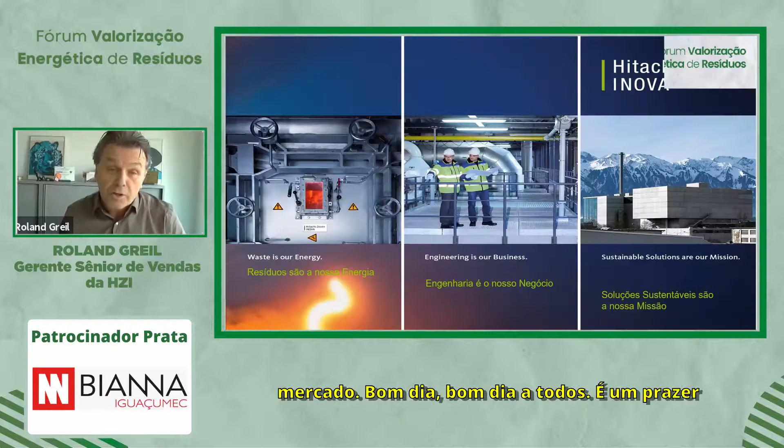Good morning, bom dia a todos. It's a pleasure for me to participate in this event. I will talk about how we, as HZI, Hitachi Zosen Inova, can contribute to the development of waste to energy in Brazil.

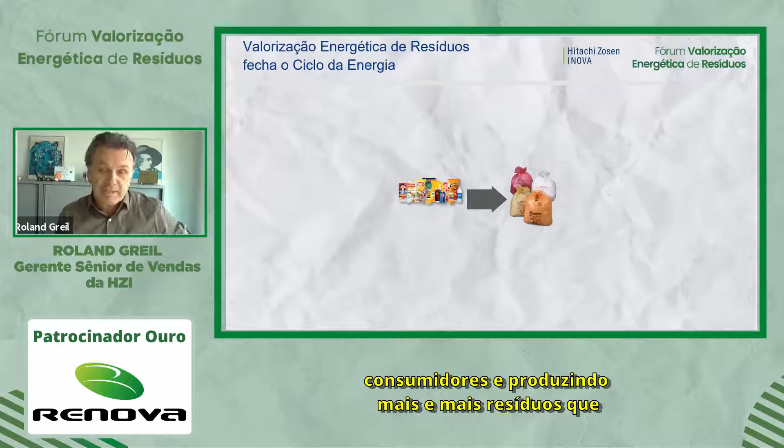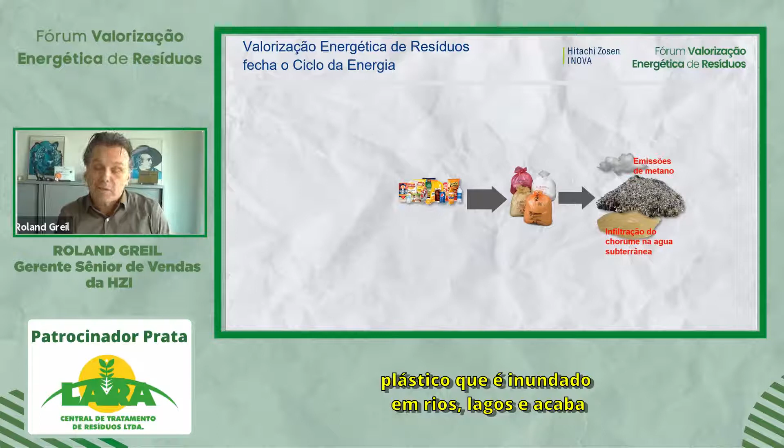We are all consumers and producing more and more waste that is polluting our environment, our drinking water, the air, plastic that is flooded into the rivers, lakes, and ends up in the ocean, and is also polluting our food. Raw material is used to produce those products and also to generate electricity.

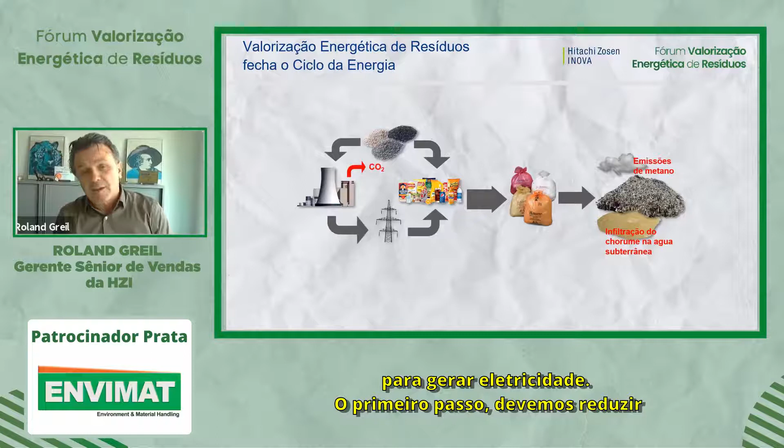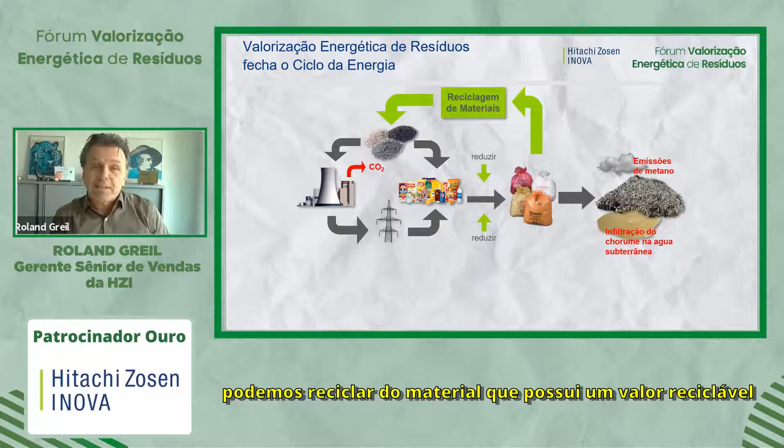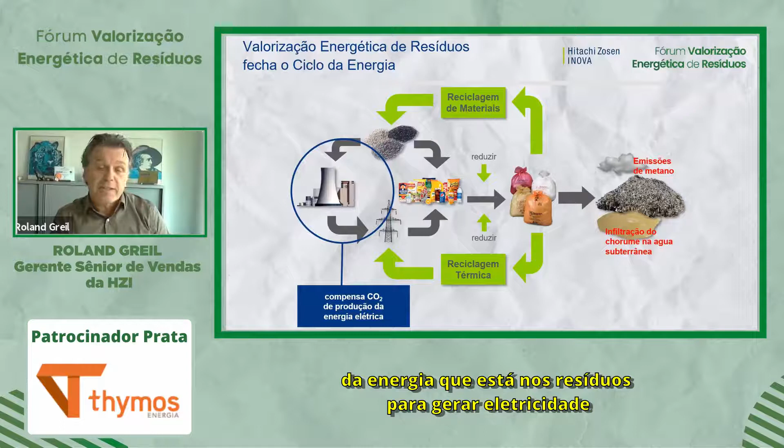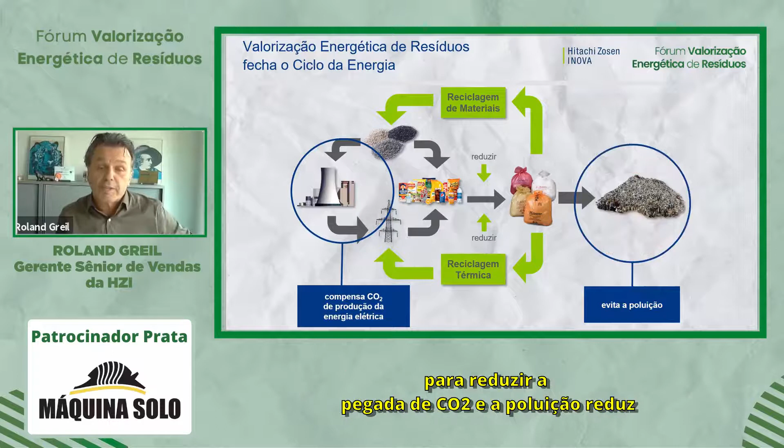In the first step, we should reduce the amount of waste we are producing, and what we can recycle, material that has value, shall be recycled and serve as a raw product to generate electricity or produce products again. From what cannot be recycled, the energy shall be recovered. That is the solution we can provide to benefit from the energy in the waste to generate electricity, and to recover materials that cannot be recovered upfront. This helps reduce the CO2 footprint and reduces pollution.

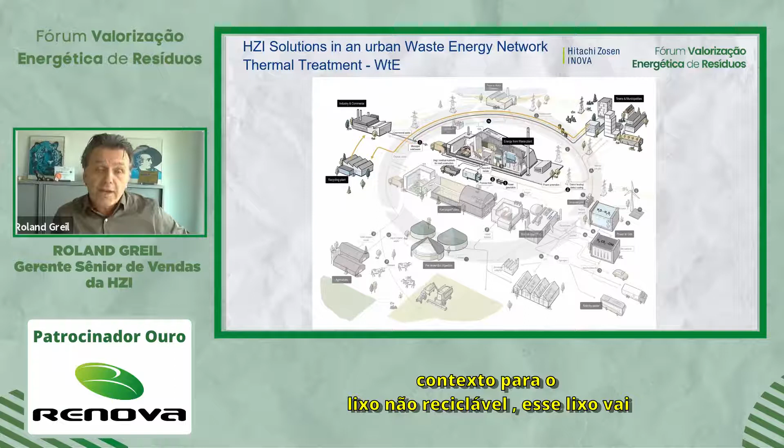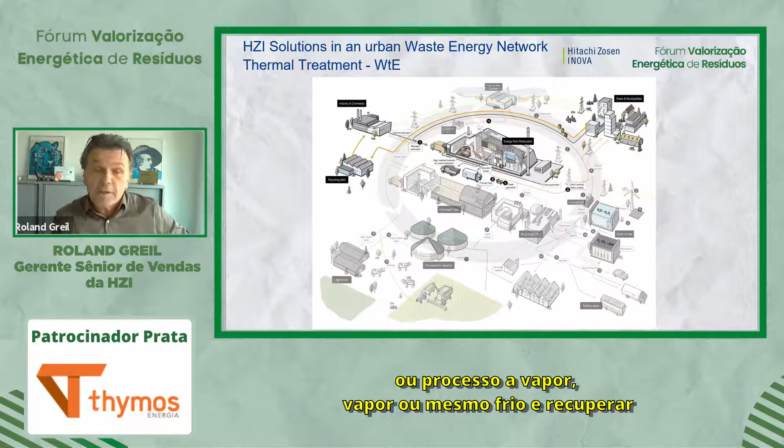What are HZI's solutions in this context? For the non-recyclable waste, this waste goes to waste to energy facilities, to thermal treatment, where, as I said before, you generate electricity, heat or steam, process steam, or even cold, and recover materials that cannot be recovered upfront. Recyclable materials can go directly to the recycling industry.

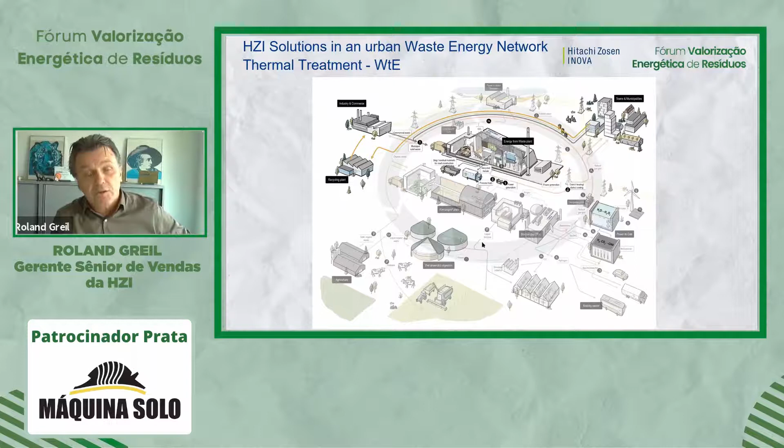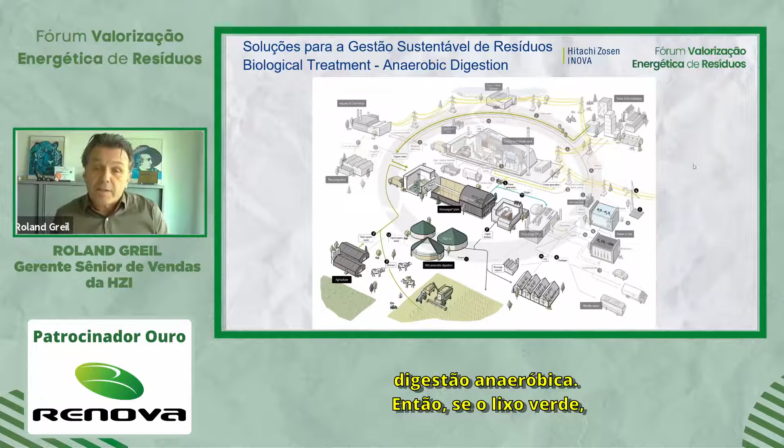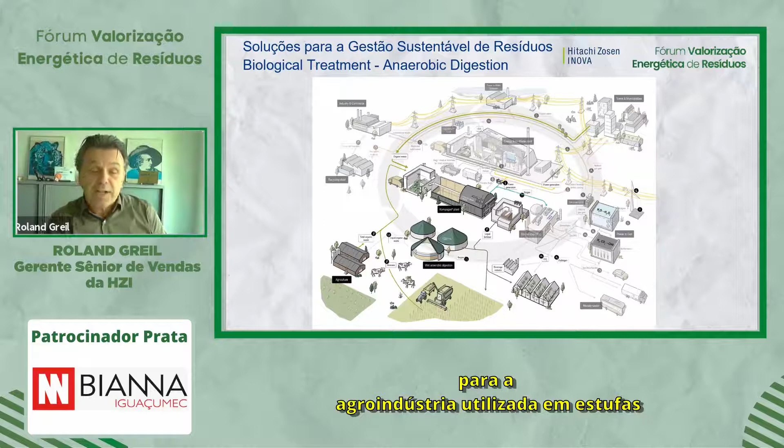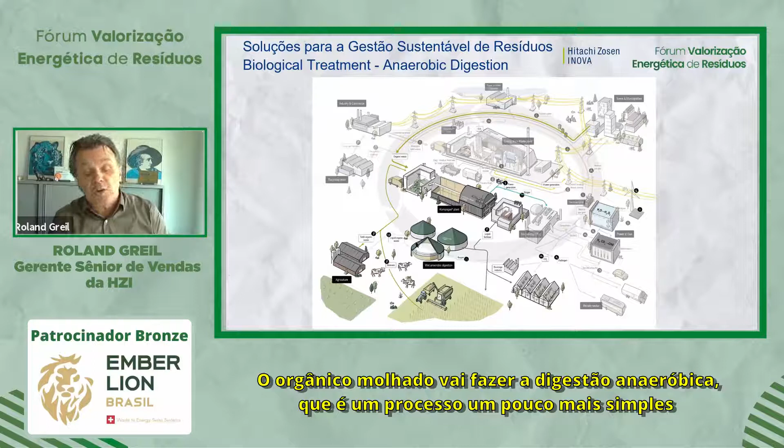For the organic waste, we are using our CompoGas technology, a dry anaerobic digestion, where green waste, organic waste from households, supermarkets, markets, the food industry, and also agriculture is delivered, and biogas is produced, and also fertilizer, which then goes back to the agricultural industry, used in greenhouses or in gardening or parks. The wet organic fraction goes to wet anaerobic digestion, which is a bit more simple process.

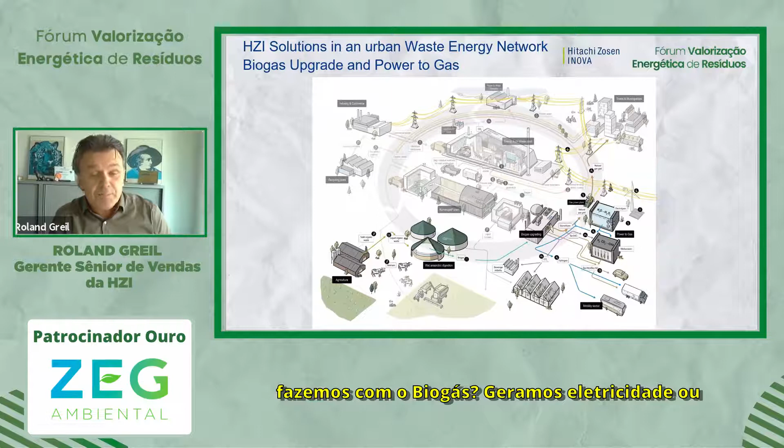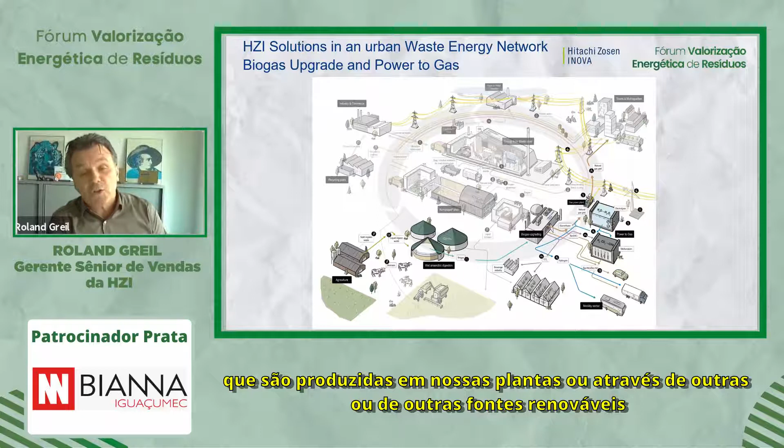What do we do with the biogas? We generate electricity as well, or we do the biogas upgrading to biomethane, which can then be used as fuel for vehicles. And for the excess energy produced from our plants or from other renewable sources, we use that in our power-to-gas solutions.

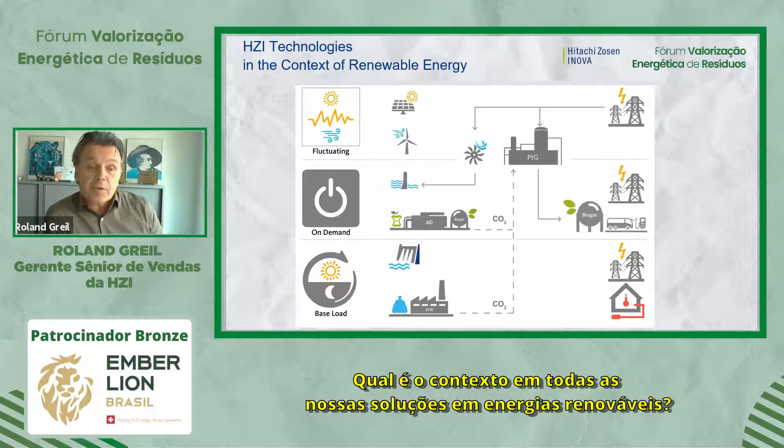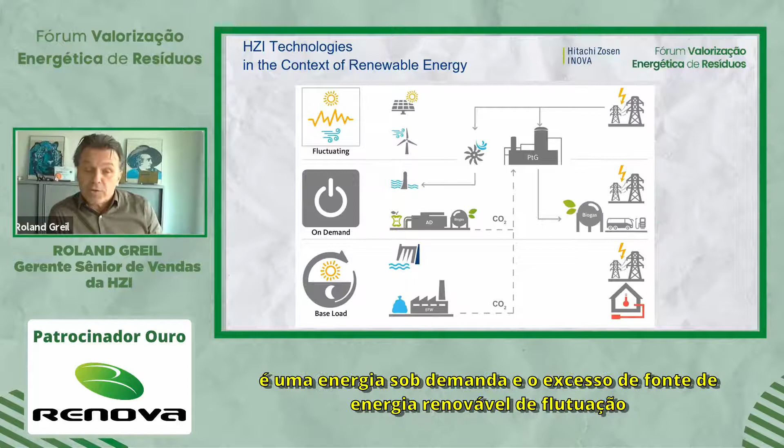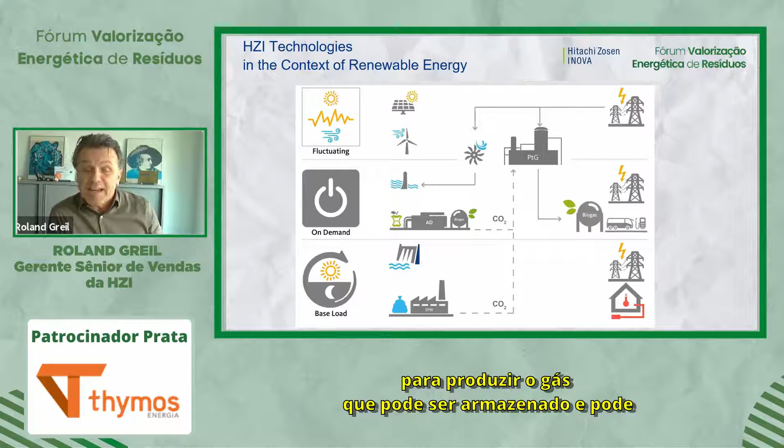What is the context of our solutions in renewable energy? Waste to energy is delivering the base load, constant production. AD, where you can store the gas, is on-demand energy. Excess energy from fluctuating renewable sources can be used in our power-to-gas solutions to produce gas, which can be stored and used when there is demand.

Hitachi Zosen Inova is a company located in Switzerland. We have our headquarters here in Zurich, with about 600 people working on solutions to deliver plants to our customers. We have other locations; in total we are a bit more than 1,000 employees, and we have belonged for 10 years to our Japanese parent company, Hitachi Zosen Corporation, which used our technology before as a licensee to build plants in Japan and other Asian markets.

As presented before, we have our proprietary technology for thermal treatment of solid wastes, anaerobic digestion of bio-waste, biogas upgrade systems, and power-to-gas systems. We don't only deliver and build plants, we also operate, maintain, and service the plants we have delivered.

Our market share over the last 10 years was a bit above 27%, and in recent years even above 30% worldwide. That is both together: our parent company covering the Asian markets, and we basically covering the rest of the world. This is all counted on capacity installed.

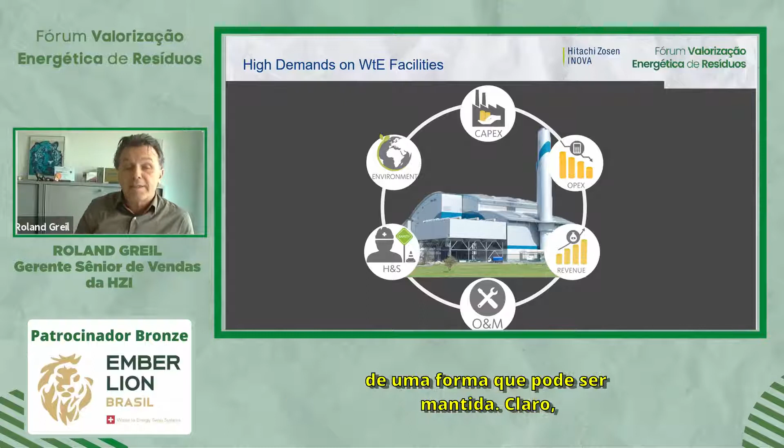We design plants for a long lifetime. Plants can live for 40 years, that is typically the average lifetime such a plant can reach, and design it in a way that it can be easily maintained. Of course, health and safety is a very, very important aspect as well, so we design a plant in a way that people during construction and operation are protected.

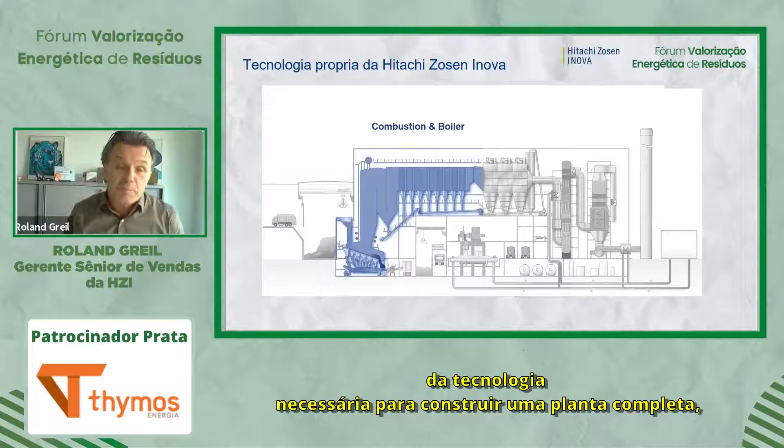We have all steps of the technology needed to build a complete plant. First section is the combustion boiler section, flue gas treatment, residue treatment, and also energy utilization.

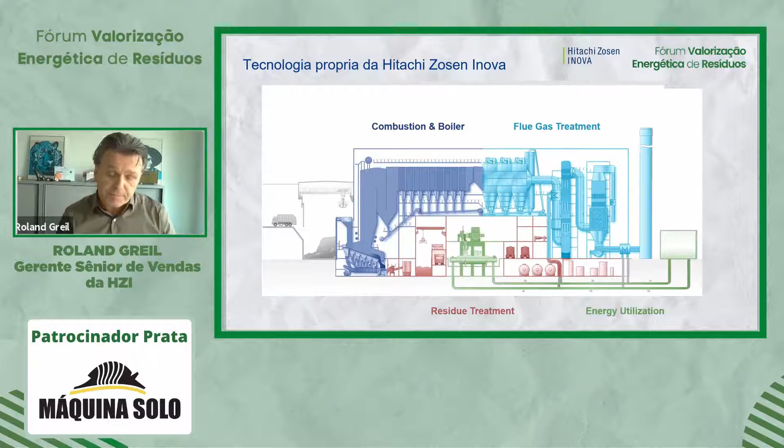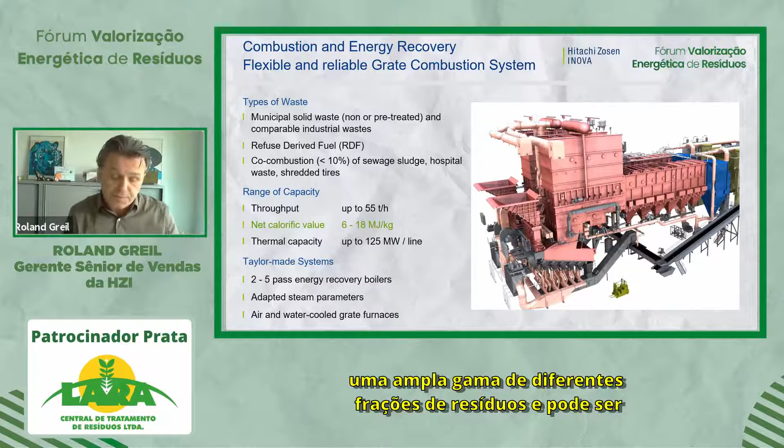Our technology, and I focus today on waste to energy, not on the treatment of biological waste, but on the treatment of non-recyclable waste, is a grate combustion technology which can take a wide range of different waste fractions and can be adapted to the local requirements and to local waste composition and specific situations.

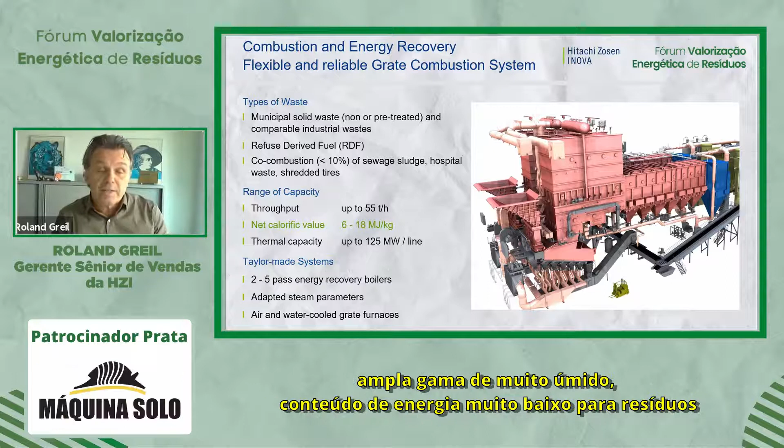You see here the range of net calorific heating values. This is a very wide range, from very wet waste with low energy content to waste with very high energy content. And we can deliver...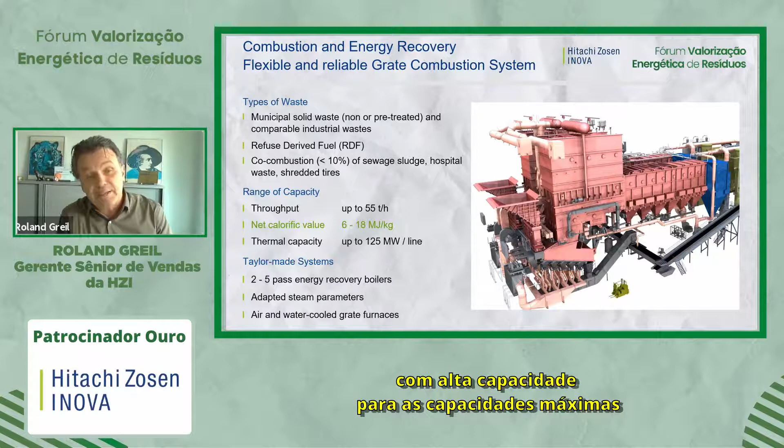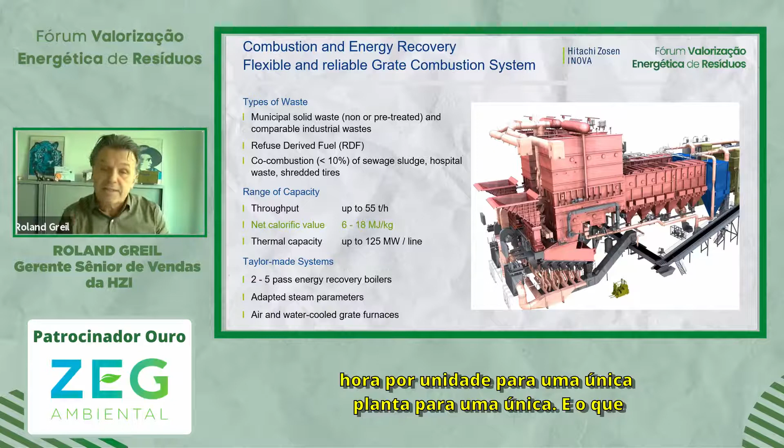plants with high capacities. The maximum capacities where we have executed projects is up to 55 tons per hour per unit for a single plant, for a single boiler, what you can see here on the picture. And the thermal capacity, that means fuel input, of 125 megawatts per line.

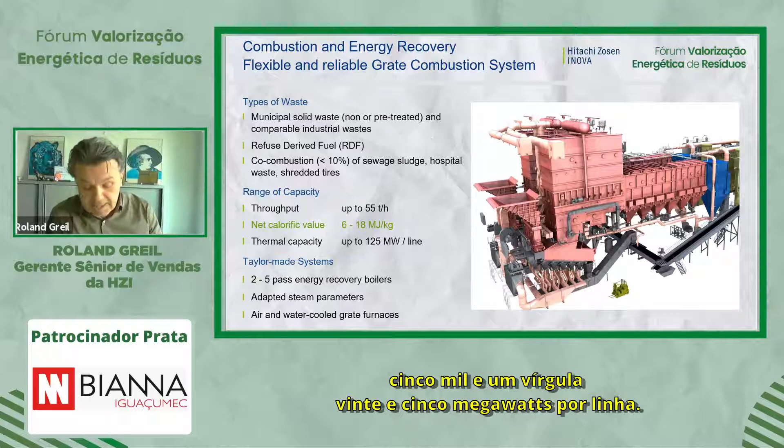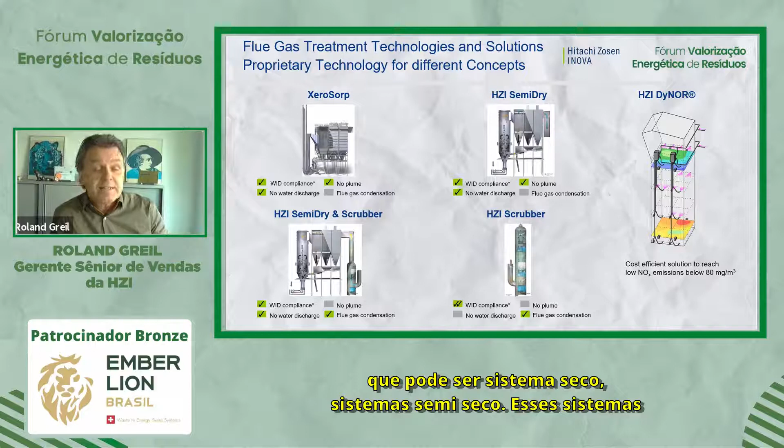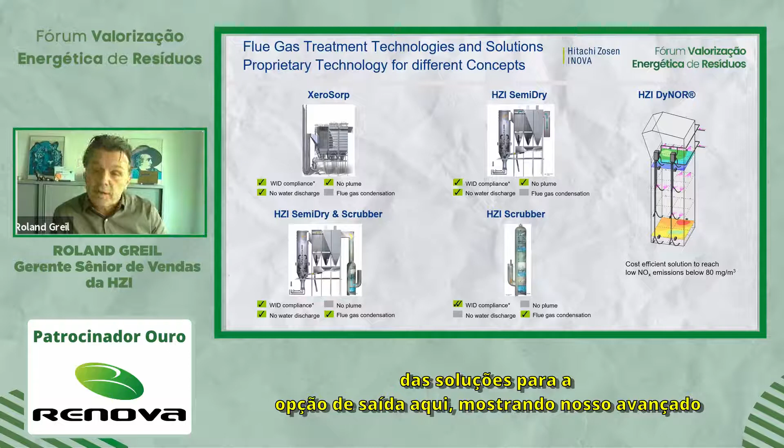We have also all kinds of flue gas treatment technologies, which can be dry systems, semi-dry systems, wet systems, or combinations of those systems, depending on the situation and local requirements. And also solutions for NOx reduction. Here I'm showing our advanced DyNOR system, an advanced SNCR system that can reach very low NOx levels in a very simple way.

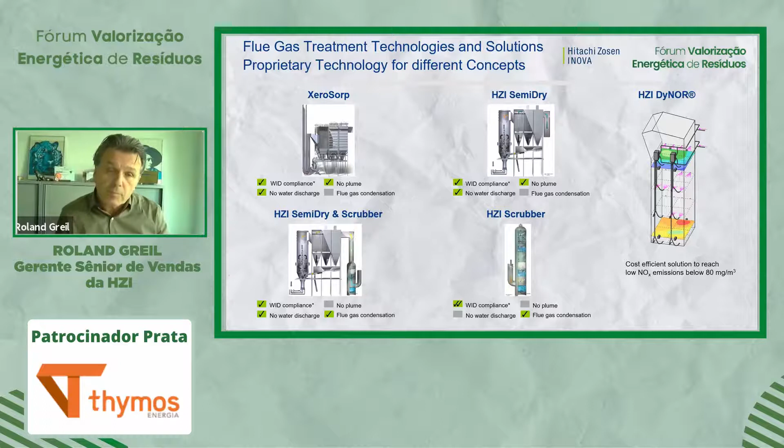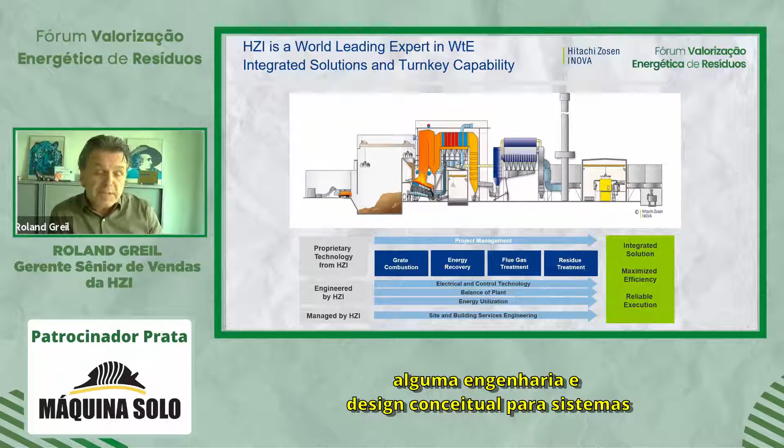We integrate the technologies that I've just presented, our proprietary technology, to deliver complete waste-to-energy facilities. And we do some engineering and conceptual design for systems that are not our core technology, such as electrical installations, control system, balance of plant system, and water steam cycle.

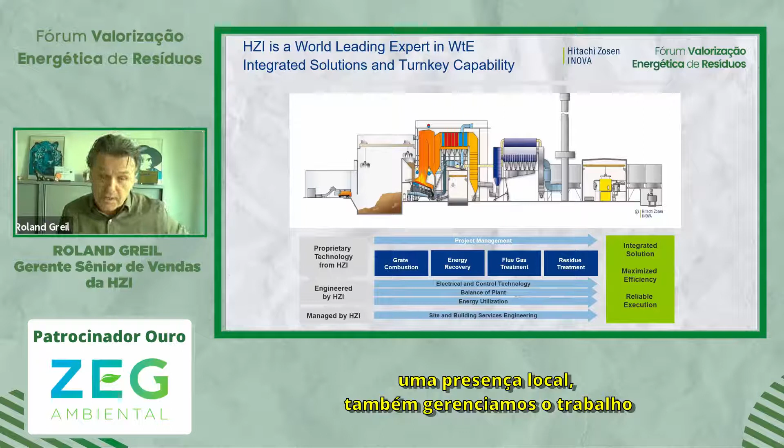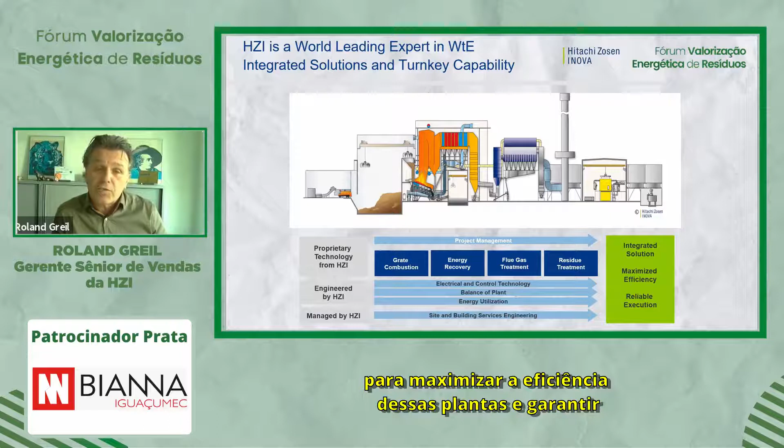And in markets where we have a local presence, we also manage civil work activities. Doing it in this way allows us to integrate those solutions in the best way, to maximize the efficiency of those plants and guarantee a reliable execution.

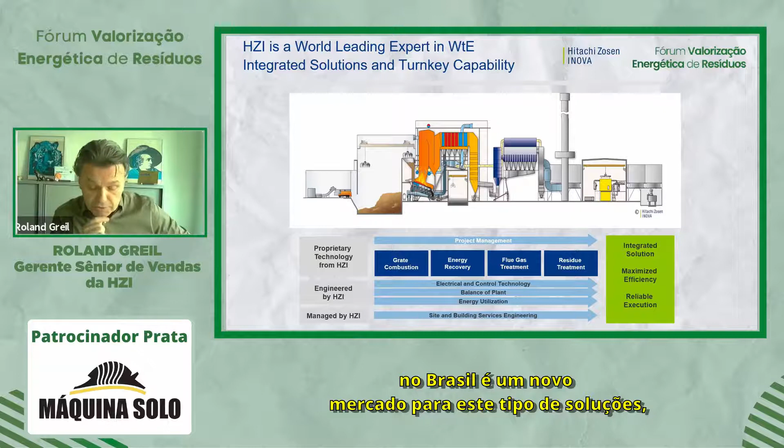This also means that in a new market, and Brazil is a new market for this kind of solutions, we typically team up with a local partner that has a strong local presence, good track record, and local experience.

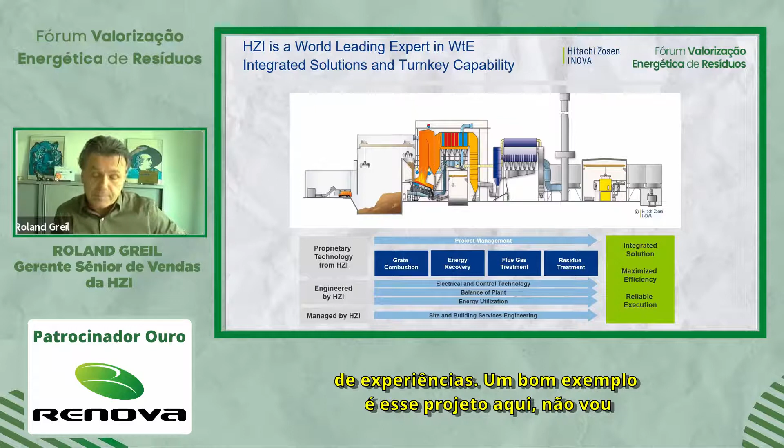A good example is this project here. I will not show the videos, but you can go to YouTube, search for Rookery South construction progress, and you will see the whole construction of this plant in four phases, four videos, building up such a plant. It's quite a complex thing, and it takes about 3 years to build such a plant.

This is a plant in UK, where we have been fully responsible for the full EPC turnkey wrap.

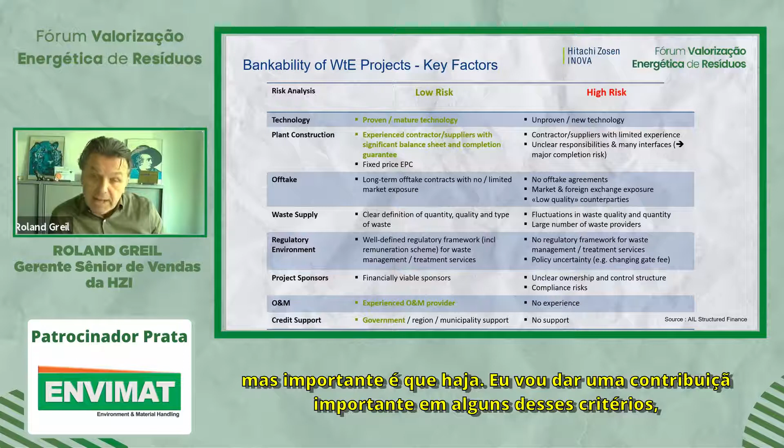A very important aspect is the financing, of course, of this kind of projects. I've listed some key factors on this slide. I will not go into the details, but importantly, for some of these criteria, HZI makes an important contribution. We deliver proven, mature technology, which is the grate combustion.

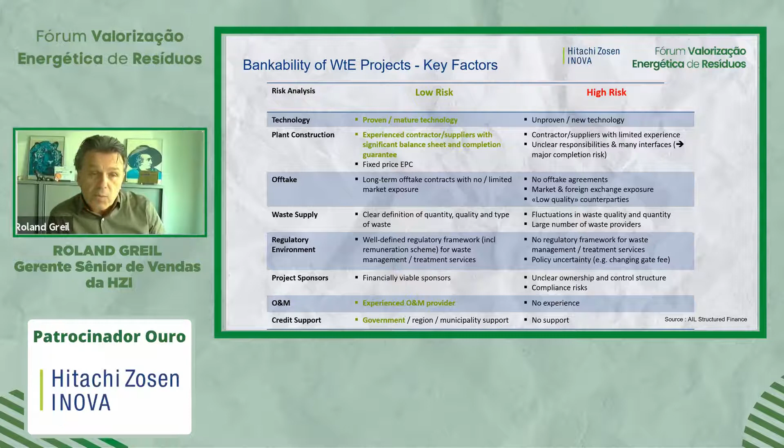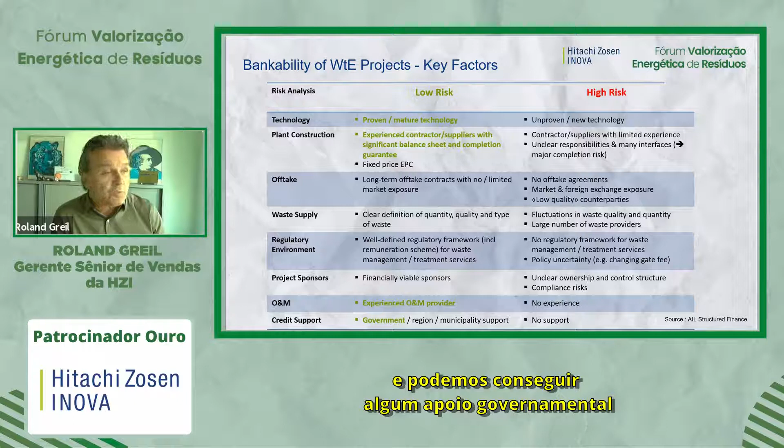We are an experienced contractor, you can see our references on our homepage. Only in UK, we have built in the last years 14 waste energy plants. We have a strong financial background, supported by our Japanese parent company, Hitachi Zosen Corporation. We have O&M experience, so we can provide also O&M support. And we might be able to get some governmental support from the Swiss Export Credit Agency, which is the SERV, to facilitate the financing of these projects.

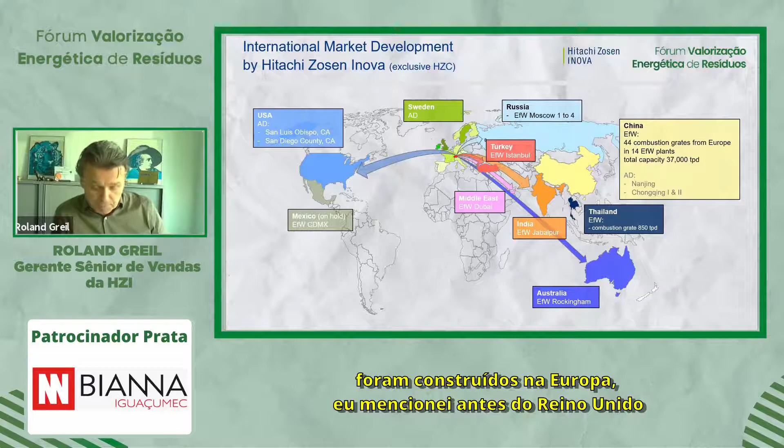Over the last years, Europe was our home base, so most projects have been built in Europe. UK was by far the biggest market over the last 10 years. Worldwide, it was China, where most of the plants are built on licenses from European companies such as us, but for some plants, especially the big ones, we deliver the combustion grates out of Europe to these plants in China. I will now show you some of our projects in new markets: in Turkey, in Australia, in Russia, and in the Middle East.

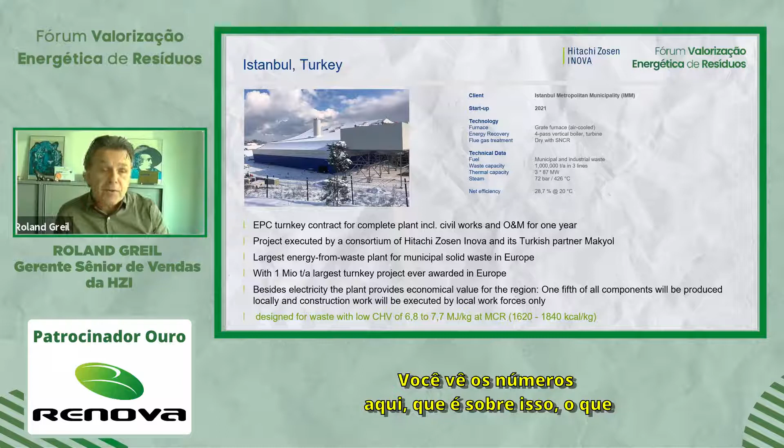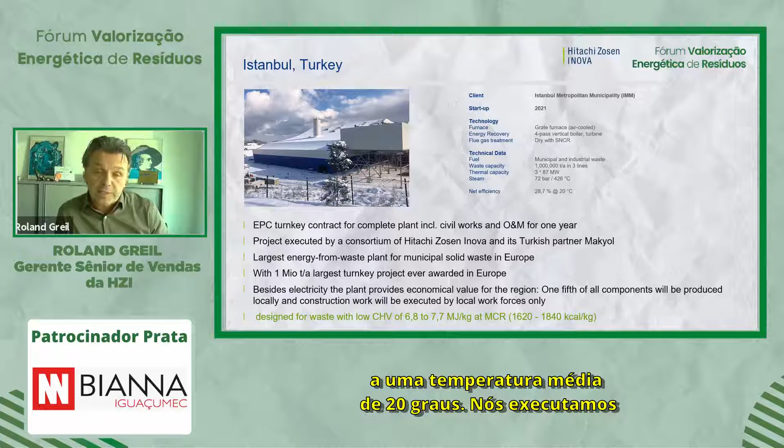One of them is this plant in Turkey, Istanbul. It's the biggest plant in Europe, just in commissioning. We started to thermally treat the waste at the beginning of March. This plant is designed for waste with quite a low heating value. You see the numbers here, which is about what you can expect from the waste that has to be treated in Brazilian facilities. Nevertheless, this plant reaches a high efficiency of almost 29% at an ambient temperature of 20 degrees. We execute this project in cooperation with a local Turkish partner, responsible mainly for the civil works activities, and together we are responsible for the erection of the equipment that we deliver to this plant.

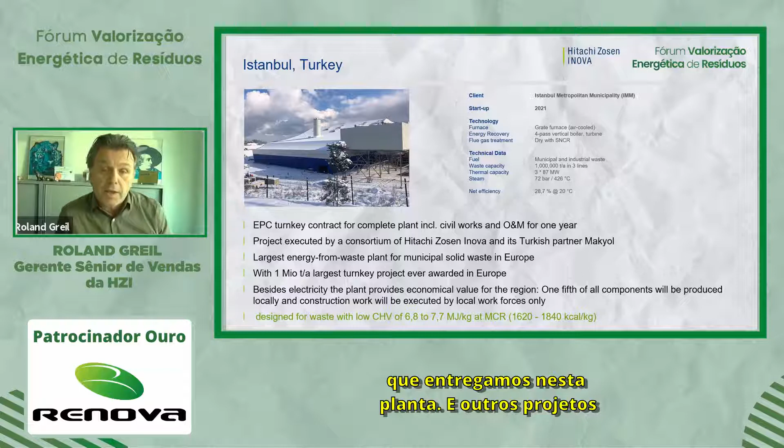Another project, or actually 4 projects, are in Moscow, around Moscow. So we have 4 plants around Moscow, and waste is delivered via transfer stations to one of these facilities. 3 of these plants are already in construction, and the driver here was the strategic decision by the Russian government to have a certain amount of energy produced by renewable energy sources. In this project, we deliver the key technology, our process technology and key equipment, to local partners, which then erect the plant and are responsible for the installation and commissioning of that plant.

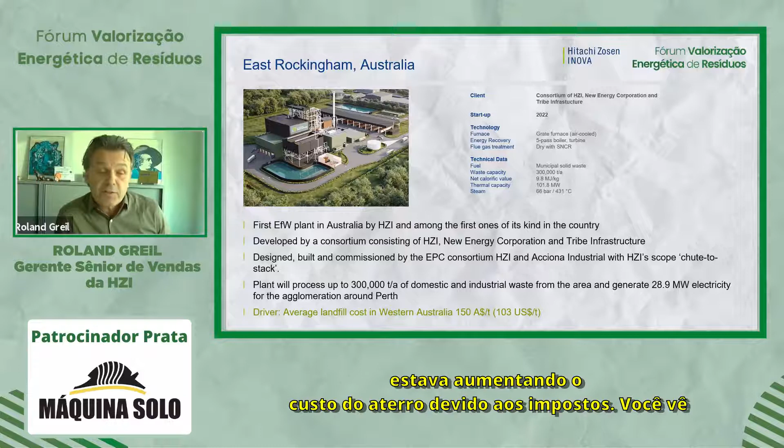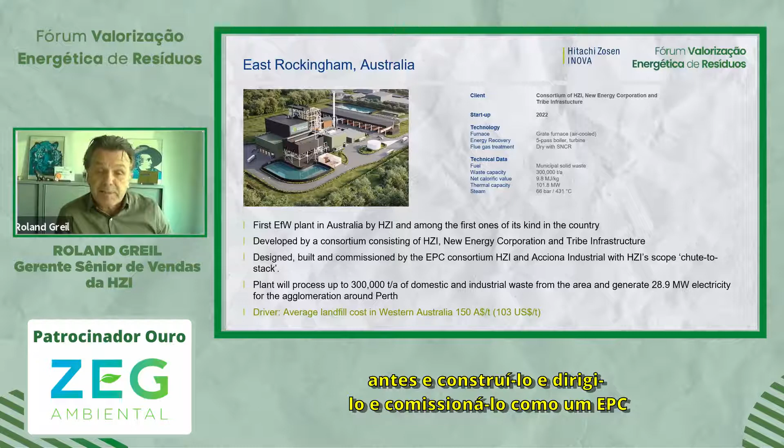Another project, that is our first project in Australia, which we contracted about a year ago. The driver here was increasing landfill costs due to taxes - you see the numbers, quite high taxes. Here also we deliver chute-to-stack equipment, the main process that I've presented before, and build it, erect it, and commission it as an EPC consortium with joint responsibilities with a partner that has a local track record and a strong local background.

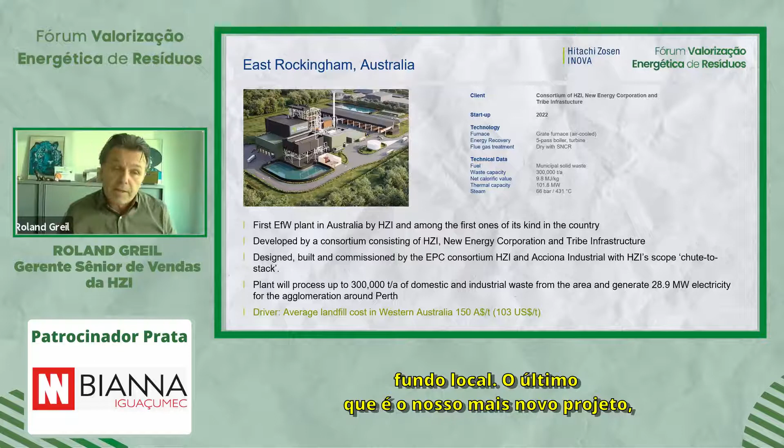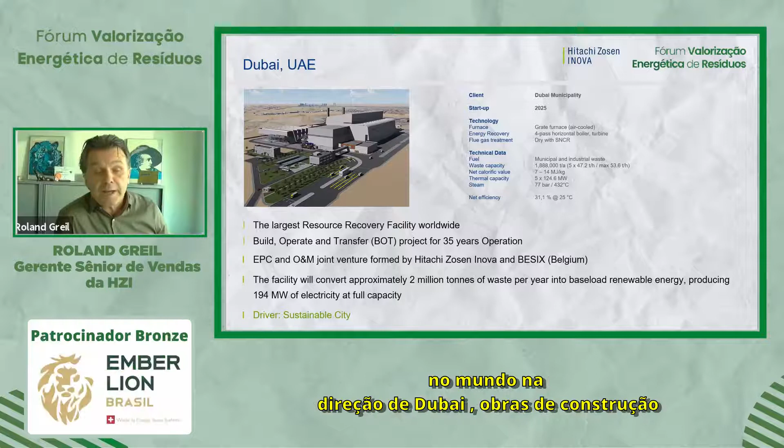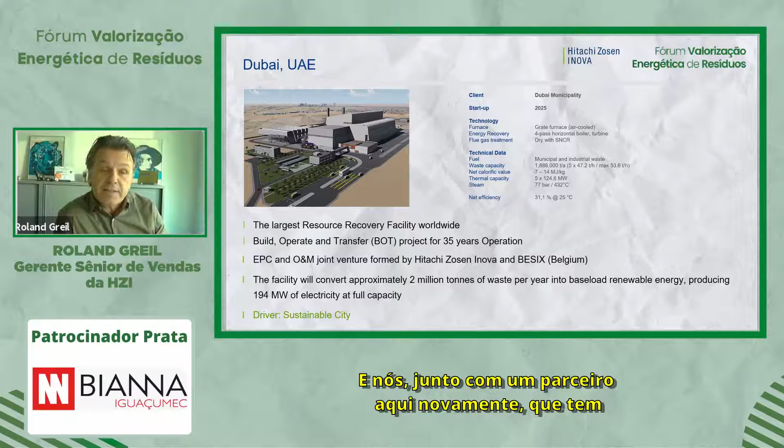The last one, that is our newest project. It will be the biggest waste energy plant in the world, in Dubai. The erection and construction work has started - excavation, foundation, and concrete pouring - about half a year ago. It is the biggest plant contracted as a single contract, with a capacity of up to 2 million tons per year, consisting of 5 units. Together with a partner here again, which has a strong local track record, we are jointly responsible to build and operate this plant for 35 years.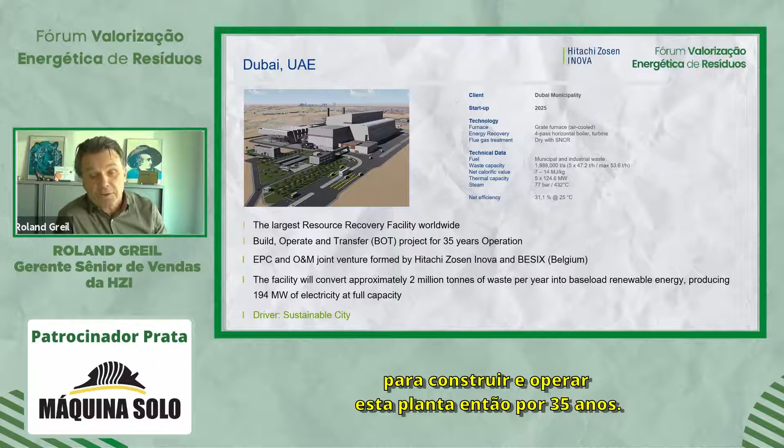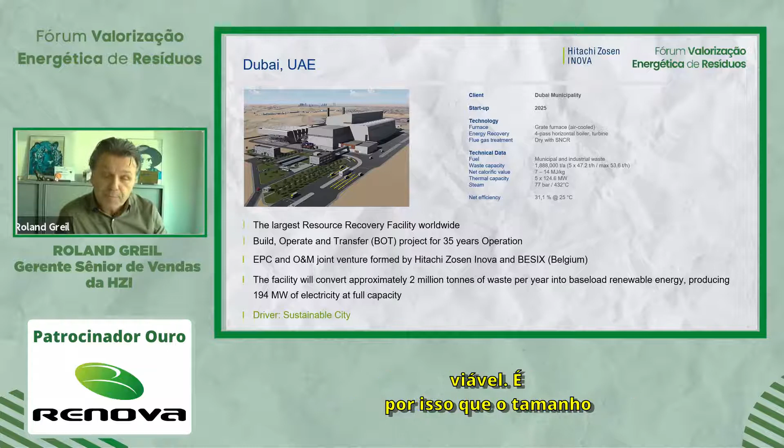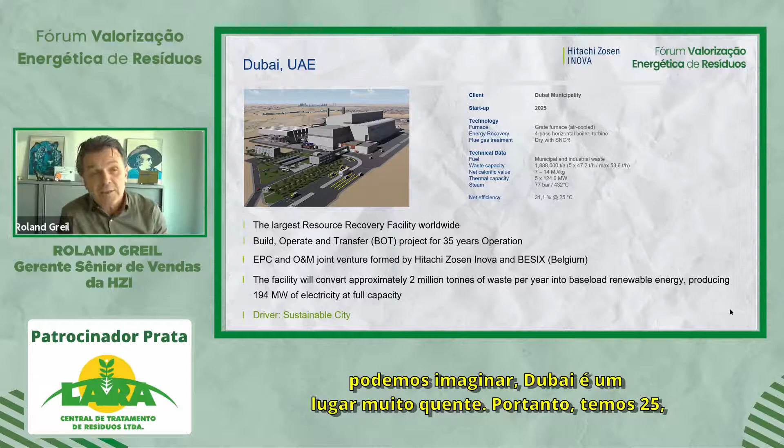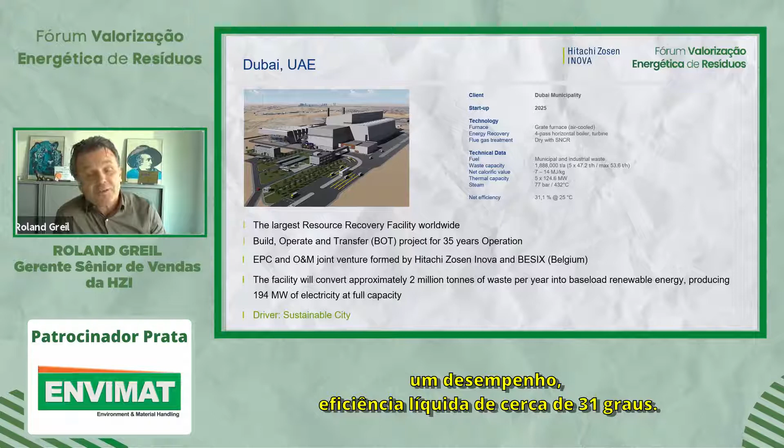Very important in this project was the economies of scale. This was very important to make that project feasible, so the size of it is really relevant, and of course also the performance. You see here, even at the ambient temperature - you can imagine Dubai is a very hot place - so we have 25 degrees ambient temperature, a performance net efficiency of above 31%.

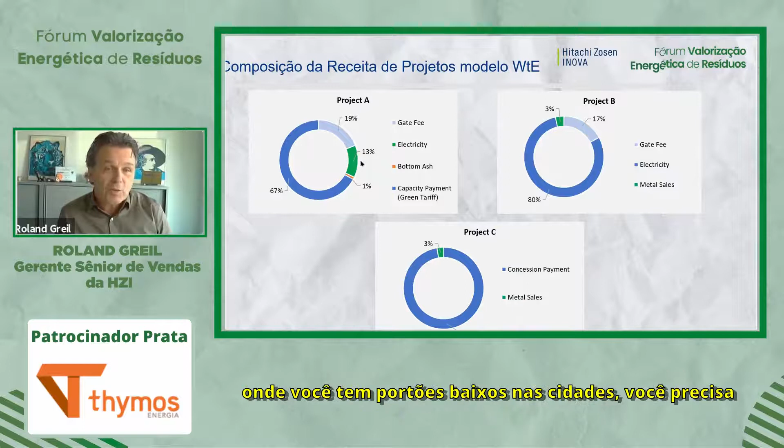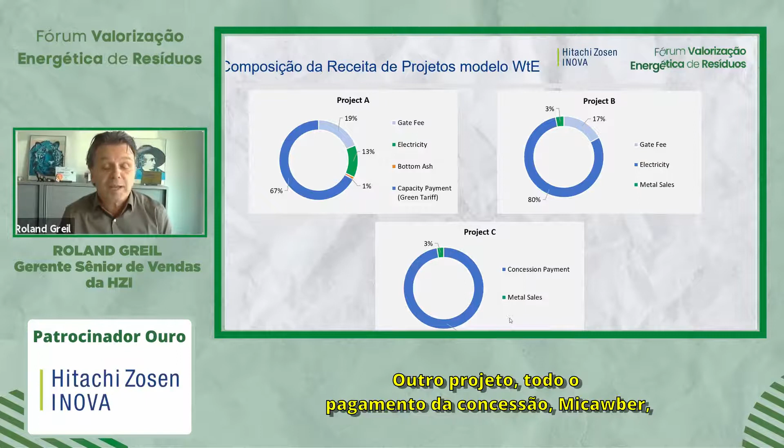I mentioned I won't go into detail here, but the drivers and enablers for this kind of project can be various. It can be an increasing landfill tax, it can be a landfill ban, it can be grants, subsidies from governments, and also governmental support. As I mentioned, ECA covered financing is sometimes also very beneficial to make the financing possible. This leads to quite different revenue models. In places with a low gate fee and low electricity tariff, you need a big subsidy. In other places where you have a good electricity tariff, the income comes from electricity - it looks like this. In Europe, it's the other way around: typically 2/3 of the revenues come from the gate fee. In another project, the whole concession payment might cover the service and the energy production.